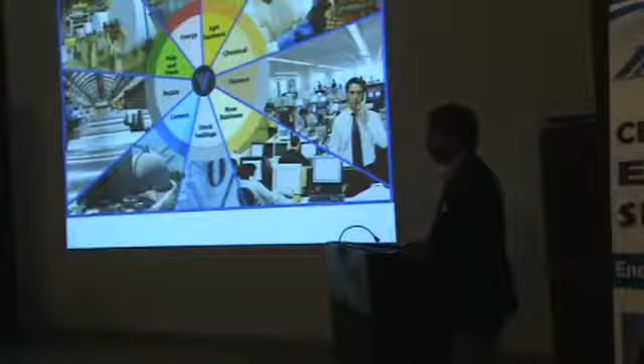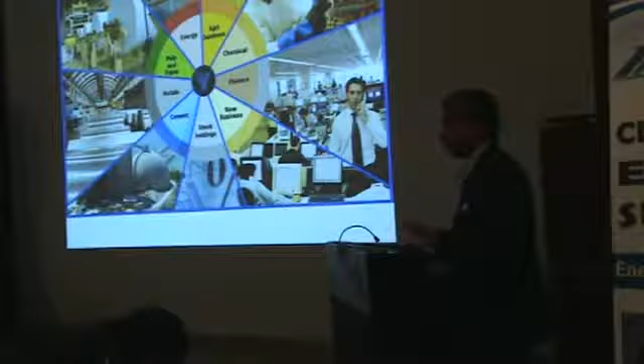A little more about us: we're part of a large Brazilian family-owned company, privately owned, called Votorantim. It's one of the largest Latin American companies in the world. We're into energy, operating 36 hydroelectric power stations in Brazil, and we're the largest producer of orange juice in the world at 35% of the world's supply — compare that to Florida, which produces 6%. We're also into agrochemicals, metals like aluminum, cement, pulp and paper. It's a very large corporation, and St. Mary's Cement is a small facet of that. In our North American operations, St. Mary's Cement fits in there in the middle.

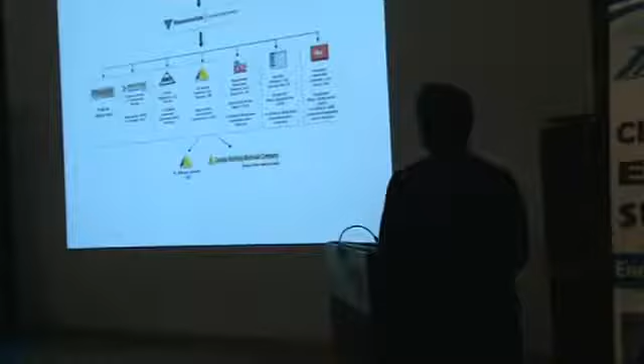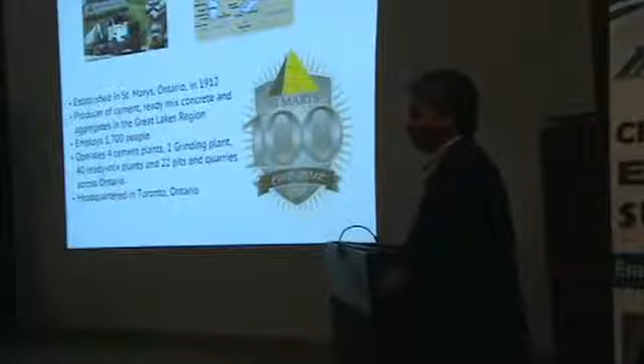We operate 2 cement plants in Ontario, 1 in Michigan, and 1 in Illinois. We're celebrating our 100th anniversary this year. An interesting story: the Rogers and Lind guys, the founders of the company, actually made their money in the Klondike Gold Rush, came back to their hometown in St. Mary's, Ontario, and bought the largest business in town, the local stone quarry. Eventually that evolved into St. Mary's Cement, with the help of one of the private investors, Gooderham and Worts. So there's a little bit of whiskey involved in all that.

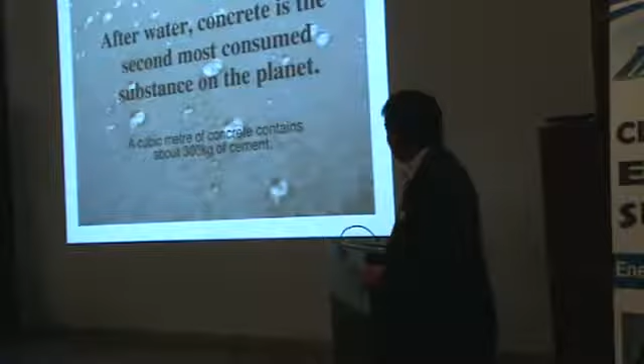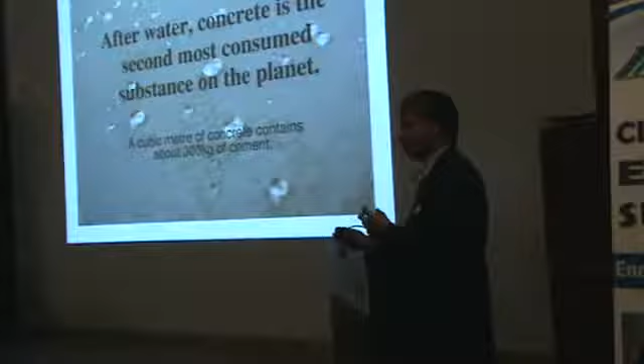Back to this — I'm going to talk a little bit about cement and it going into concrete. After water, concrete is the second most consumed substance on the planet. It's important to understand a bit about cement, because a cubic meter of concrete contains 300 kilograms of cement. Cement is the glue that holds sand and gravel together, and water doesn't just wet the mixture — it actually becomes part of it chemically, acting like a catalyst to the glue.

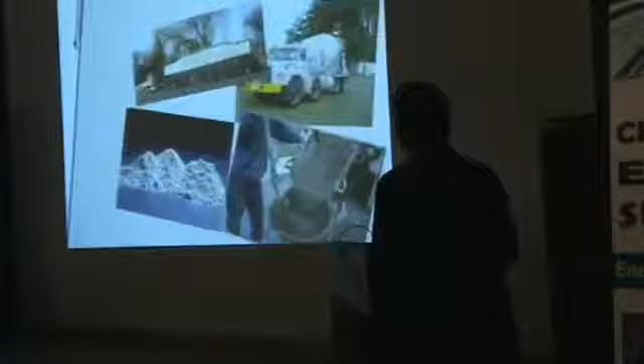So I'm going to take you through some cement 101 — trying not to be a bad teacher like Cameron Diaz in Bad Teacher. I'll talk a little about manufacturing cement. That is not a cement truck, despite the fact that 99% of everybody thinks that is a cement truck — that's actually a concrete truck. The cement truck holds powdered cement, and what comes out of the concrete truck is concrete. So now you know that.

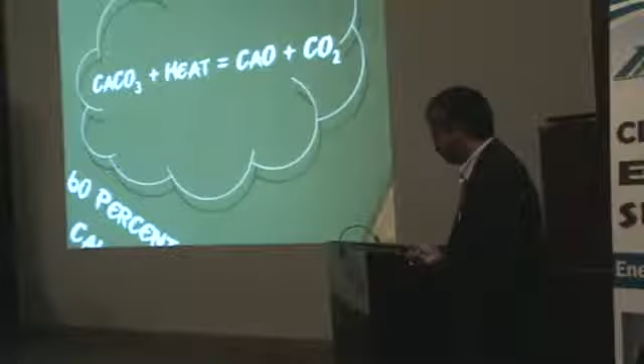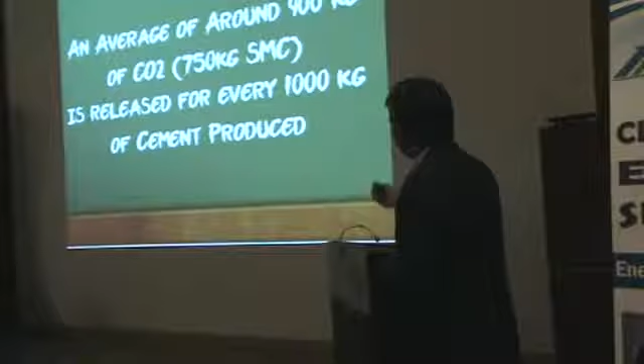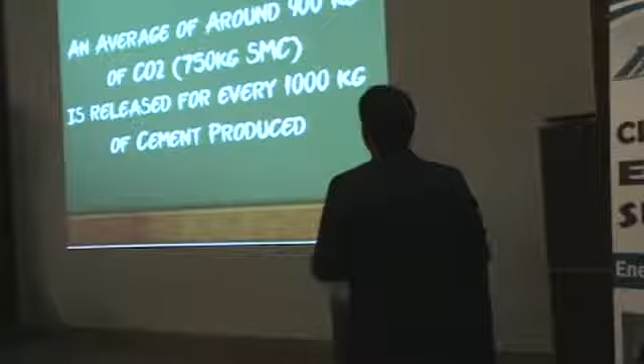Making cement produces large quantities of greenhouse gas — that's the Achilles heel of cement manufacturing. Two sources of greenhouse gas are fuel and calcination. Calcination is when you take limestone, which is calcium carbonate, and add heat to it, producing lime, calcium oxide. That lime is what we make cement out of, and CO2 is what comes out of the stack. The average Canadian cement plant emits around 900 kilograms of CO2. Our company operates the 2 lowest greenhouse gas intensity cement plants in Canada, averaging around 750 kilograms per ton of cement — so 3/4 of a ton of CO2 goes out the stack for every ton of cement that goes out the gates. That's a huge amount of CO2, working out to about 5% of the world's man-made CO2 coming from cement.

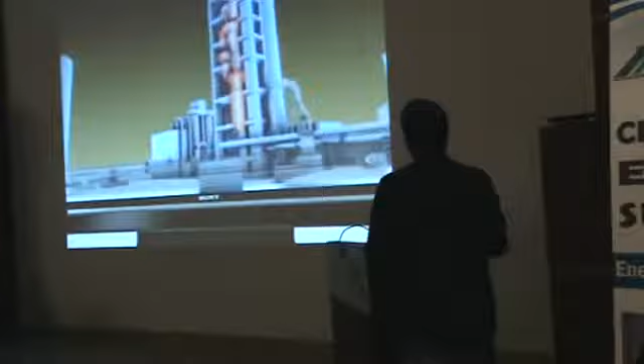This is a nice clip the Discovery Channel did at the Bowmanville cement plant. Basically, we take rock out of the ground and crush it into a very fine powder with big machines — this machine has about a 4,500 horsepower motor, so it's a pretty big motor. It grinds the rock into a fine powder, like talcum powder — that's limestone dust you see there. It gets put into this big preheater tower, the one you see on the skyline of Clarington. The exhaust gases coming out of the kiln are used to preheat that limestone up to a very high temperature, recovering that energy. If you look at those Dyson vacuum cleaner ads, they're kind of mirroring this technology, using a similar approach to de-dust and concentrate the heat.

We get the heat from burning fossil fuels, and we burn a lot of them. The Bowmanville plant here burns about 30 tons an hour of petroleum coke. That's a lot of energy. 92% of the energy we consume, on a gigajoule basis, is coming from fossil fuels used directly.

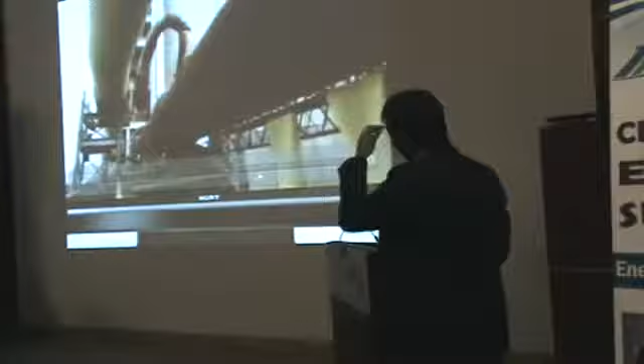So that's a shot inside the kiln from the thermal camera. If you think of that kiln, it's kind of like taking a paper towel tube, putting sugar in one end, putting it on a little angle and rotating it, and the sugar will move from one end to the other. That's all we're doing, but on a ginormous scale.

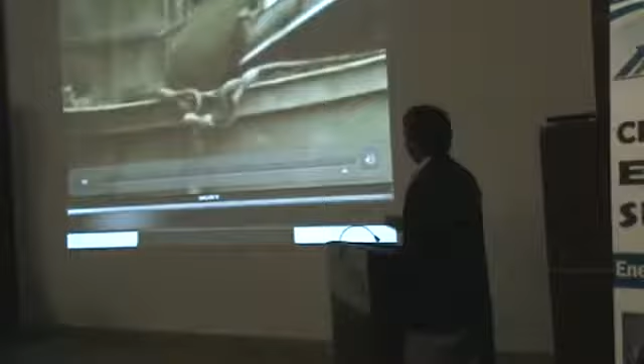You can see there that things are pretty hot. We take the stuff out of the kiln and grind it up again in the presence of gypsum in these big ball mills. These things contain grapefruit-sized balls that just smash around and smash it into a powder. Then voila, the cement truck picks it up and drives away with it, delivering it to the concrete trucks, where we mix it with sand, gravel, and water.

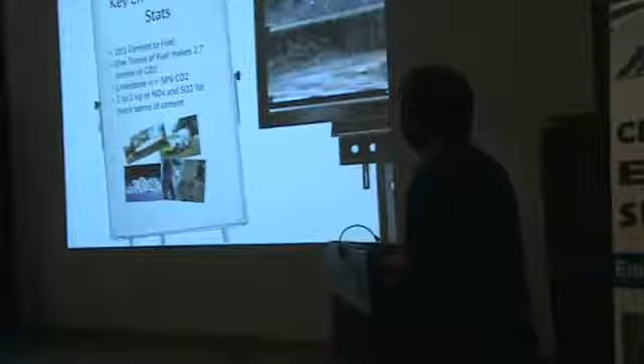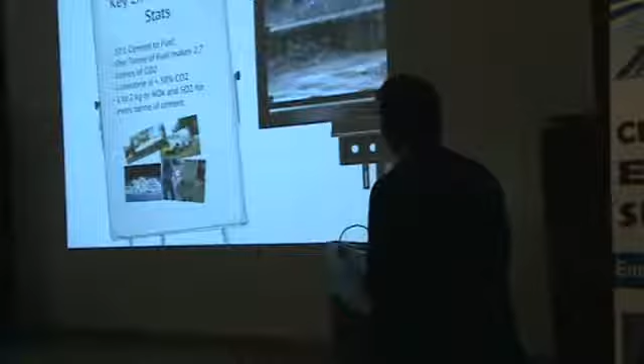Some other key environmental stats: for every 10 tons of cement, it takes 1 ton of fuel, and 1 ton of fuel makes 2.7 tons of carbon dioxide gas. Limestone is about 38% CO2 by mass, so that's a lot of CO2 released in every single ton of limestone. And 1 to 2 kilograms of NOx and SO2, which are smog and acid rain chemicals, come out with every ton of cement.

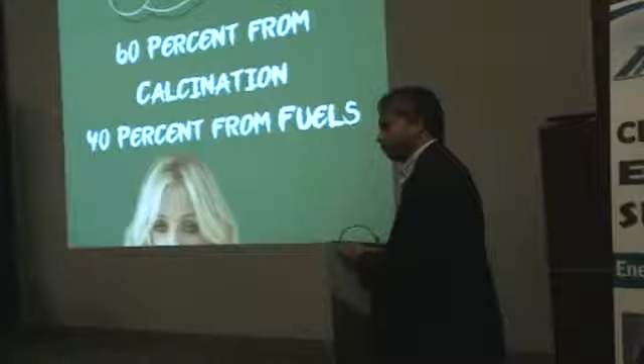60% of all of our greenhouse gas produced comes from the limestone, and only 40% is coming from the fuels. So even if you're as efficient as possible and try to reduce fuels or find greener, carbon neutral fuels, that doesn't help fix the problem coming from the limestone. It's how do we solve that big problem?

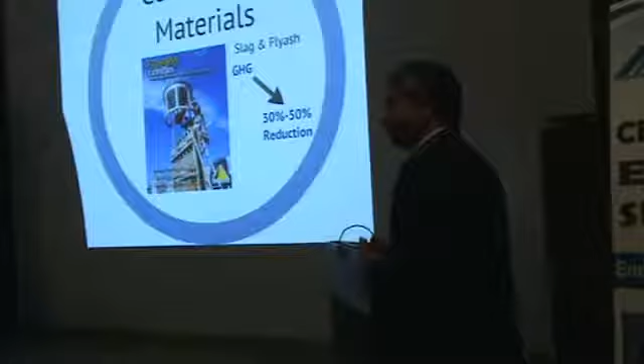Some of the things we've done is look at cementitious materials. Wastes from the steel industry, like slag, and fly ash from coal-fired power stations, can be mixed into concrete and reduce the amount of cement needed by as much as 50%, which reduces the greenhouse gas by 30 to 50%. That's a huge savings in greenhouse gas emissions by utilizing two wastes that would otherwise have to find landfill for.

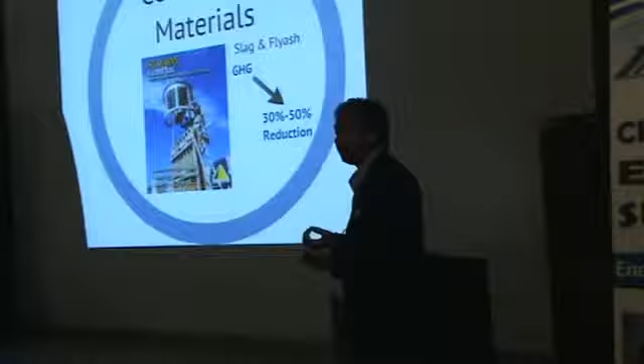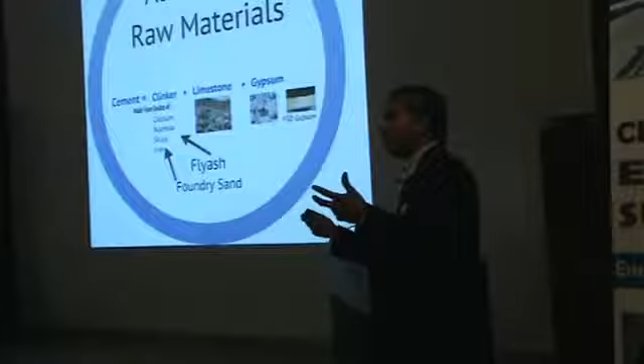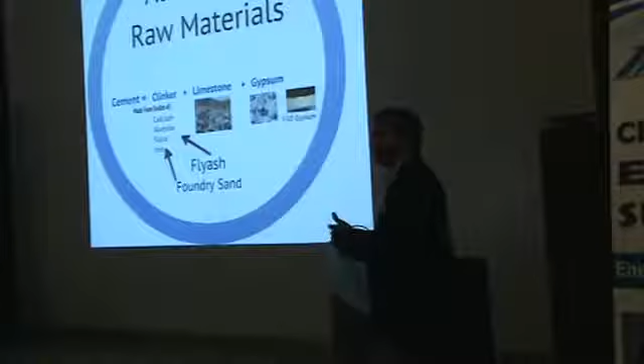Other things we do: alternative raw materials. We can use other raw materials rather than virgin raw materials, reducing our footprint by indirectly reducing transportation distances, and utilizing things like flue gas desulfurization gypsum. We have to add gypsum in, but we can take some flue gas desulfurization gypsum, which comes as a waste from scrubbers at, say, coal-fired power stations, and mix that in to substitute gypsum. So these are some of the things we can do.

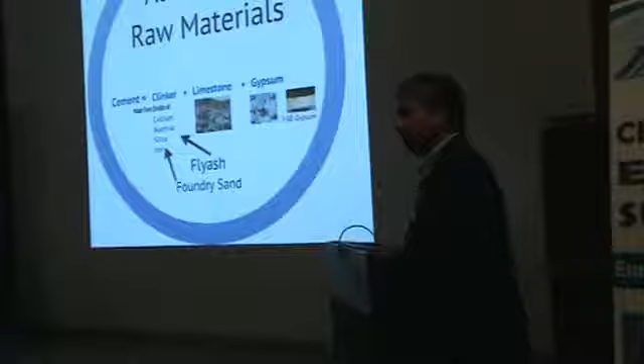Foundry sand from here at Bowmanville Foundry — after they make sand castings and stuff like that, we can take some of that and substitute it in as a silica and iron source for manufacturing cement. That's how we can also help make ourselves more sustainable.

Energy conservation, a big one here in Bowmanville. We're one of 10 companies making a difference on the CIPEC Task Force annual report that came out from Natural Resources Canada. Also, the Bowmanville cement plant here was the first facility of any kind in North America and South America to achieve the ISO 50001 Energy Conservation and Management Standard, and still the only one in Canada to have that. It's a pretty impressive goal here with the help of 360 Energy in achieving that.

Product innovation: the industry got together to develop a new cement standard that we are actively pushing and marketing, which contains about 10 to 15% interground limestone into the cement product. That reduces the amount of material that has to go through the kiln by 15%, which reduces greenhouse gases by 15%. And for what it might weaken the glue effect of the cement, it actually increases the strength equivalently by having microfine sand particles, so that microfine aggregate offsets any dilution factors.

That product is something we're working well on now with procurement at governments, which buy about 60% of our product through municipal and provincial infrastructure. We want them to be the kickstart catalyst to utilizing these products more.

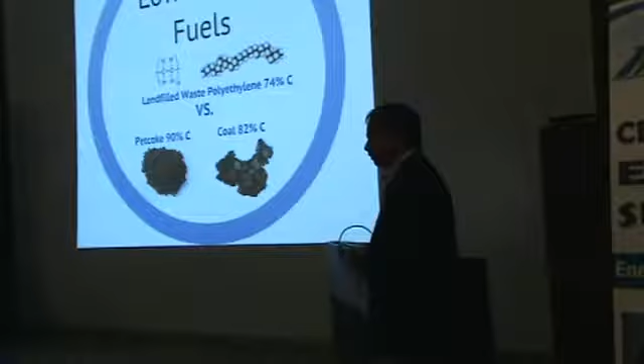Low carbon fuels, utilizing things like plastic bags. We did a trial at our St. Mary's, Ontario plant. At the temperatures we're burning at, over 1400 degrees Celsius, it thermally destroys any organic molecule. There's absolutely an absence of any harmful, toxic organic molecules.

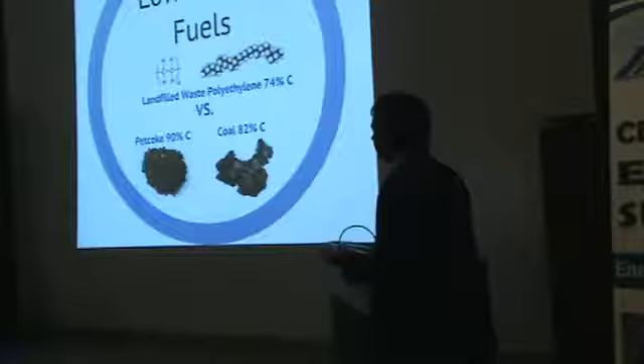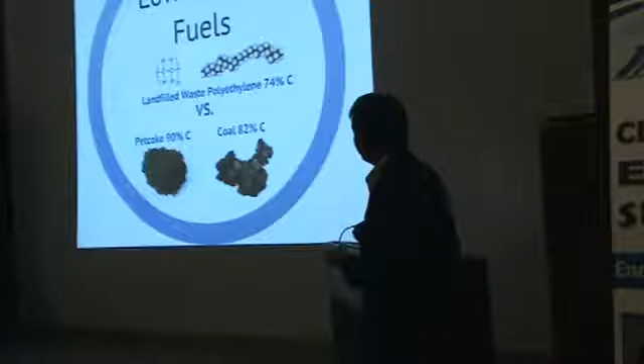And so these things that would otherwise be sent to landfill and waste can be utilized as a fuel that is actually much more highly refined than things like petroleum coke, which is bottom of the barrel, literally, and 82% carbon coal. These things are unrefined natural resources that are in limited supply. And if we can utilize things that have already kicked the can and would otherwise just be thrown in the trash, that's far more sustainable.

So these things make us more sustainable, and it's very important for us, but it doesn't do everything for us. It doesn't solve that problem with what do we do with the limestone. And it's one thing to be sustainable, it's different to be environmental. And environmental is not necessarily economical. It's important that we understand 3 points to the triple bottom line of sustainability, being socially sustainable, environmentally sustainable, and economically sustainable. Without any one of those, you won't be around.

It's one thing to be environmentally friendly, but if you can't do it economically, you're out of business. If you can't do it in a social manner, the public doesn't want you around, regardless of how much money you may make or how environmentally friendly you are. So it's very important to understand triple bottom line sustainability.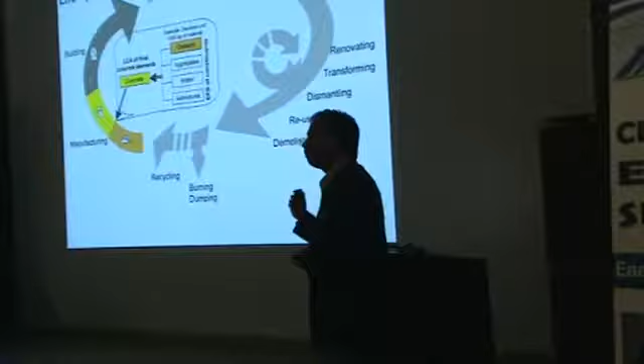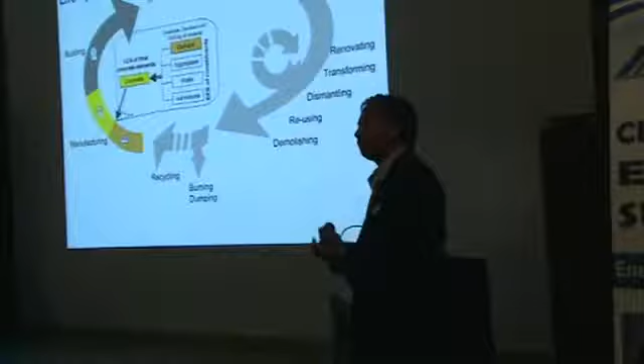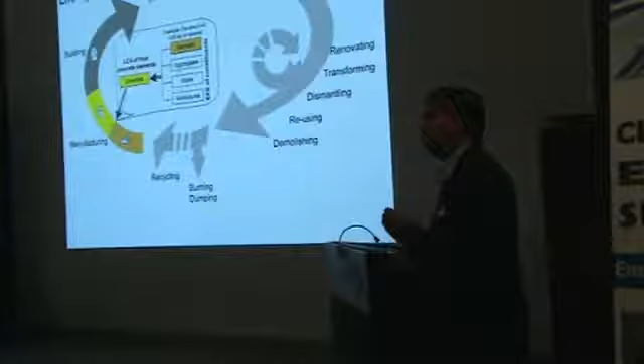And in so doing that, it becomes very important for our industry and for our company to let people understand the life cycle analysis of the products and the projects that come from our building materials, because the types of things that are made from cement are very important to the standard of living that we have today. It's so ubiquitous, this concrete. You're in a concrete building standing on a concrete floor. Those are the things that everybody takes for granted, that's coming from things like the cement plant next door here.

Other big things that people see is when people talk about sustainable energy and renewable energy, they don't really realize that 870 cubic meters of concrete is required for every 1 megawatt of output power. You've got to hold those things to the ground or they're just going to fall over, and you do that with concrete. So 1,500 ton foundations, as well as all the steel, aluminum, magnesium, glass, and carbon that goes into these, and the greenhouse gases that come out for every ton of that.

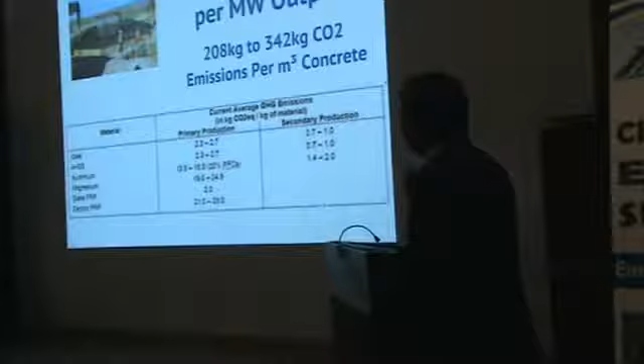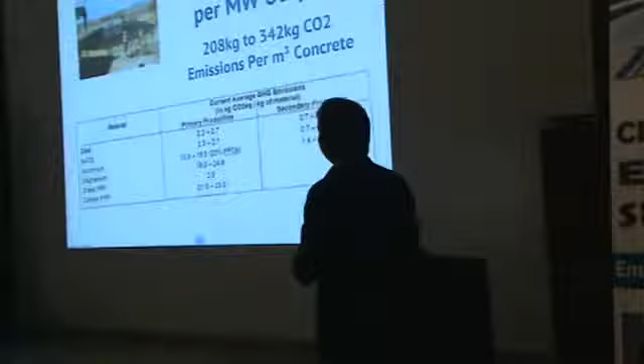That's a lot of emissions, 208 to 340 kilograms of CO2 per cubic meter of concrete alone. So these things start at a deficit on the greenhouse gas that they can offset, and they have to work for a long period of time before they can actually break even on their greenhouse gas footprint. So how do we make these projects more sustainable? And why should we, as a cement industry, be worried about that? Well, we're worried about it because we use huge amounts of energy, and I'll get into that a little bit later.

The partnership we have with Pond Biofuels here is an interesting one. We saw that we produce huge amounts of greenhouse gas, and if we want to be sustainable, we better find a way to deal with that greenhouse gas. Now, there are other things you can try to do with it, but they produce a waste. If you produce a waste, you now have a waste problem. You now have trucks leaving with waste. What do you do with that? So we have to try to find something that doesn't involve that.

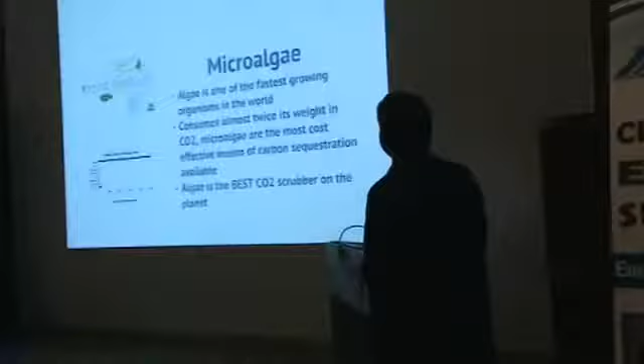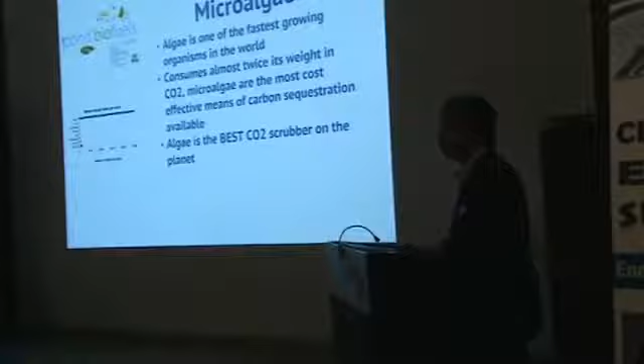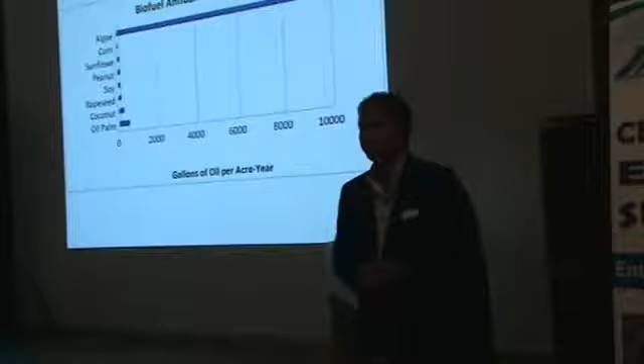So one of the things about algae is it's one of the fastest growing organisms in the world. It consumes twice its weight of CO2 every day. And it's one of the best CO2 scrubbers on the planet. It just eats up CO2. If you look at algae for generating biofuels, by far it blows away everything else on the planet that we think of. And not only that, but it doesn't compete with crops for food. So the food crop argument doesn't get involved when you talk about algae-based biofuels. So you're talking about producing between 10 and 13,000 gallons per acre per year versus corn at 300.

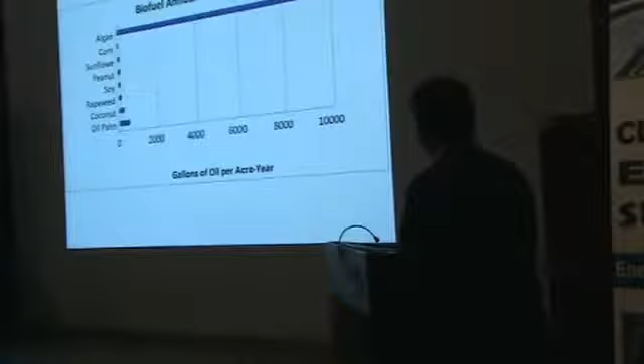So how does the algae do it? What does algae do? Well, algae is basically a plant, but a single cellular plant. And it's photosynthesis. It takes the energy from the sun or from artificial light, and it will consume that by breaking the CO2 into oxygen and carbon. It uses the carbon to manufacture itself as a carbon-based organism and releases the oxygen. And from that, we can then split that, harvest the lipids, the oils, and manufacture things like biodiesel and glycerin.

So how do we get down to this? When we got into this project, we thought, okay, well, there are a bunch of companies out there doing algae, and we looked at them and they talked about, oh, we've got algae growing in a beaker, so maybe we'll build a beaker so big that it'll work for your cement plant. We kind of went, I don't know. These guys approached us and they said, we want to scale down existing processes. Look at big industry and scale it down.

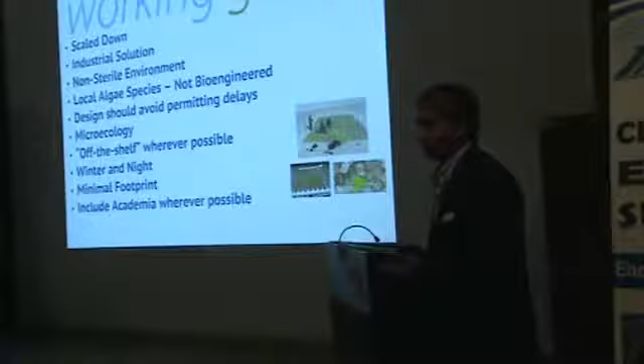We want industrial solutions. We don't work in a sterile environment. I mean, at a cement plant, a surgical instrument is a sledgehammer, right? It's not a very sterile environment, big industrial stuff. We want to work with a local algae species. We want to make the worst environmental hazard be the equivalent of spilling a little bit of grass seed on the lawn. You hear about people biologically altering algae species for maximizing oil, but there's a reason why we don't do it: the potential for ecological issues that we don't want to get into.

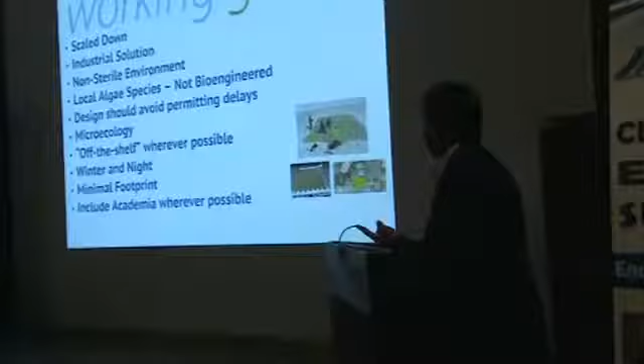And second of all, the algae species that we selected is the same one you find in a puddle outside, literally. We picked that because it's had a couple billion years of evolution to say that it's the best species out there right now anyway. We wanted to avoid permitting delays, so we went with a very small scale at the maximum we would be allowed to do without going down multiple years of permitting delays. We wanted to find a solution today, not get caught up where nobody at the Ministry of the Environment has ever heard of an algae project on stack gas, so they scratch their head and wait 2 or 3 years. We didn't want to get into that.

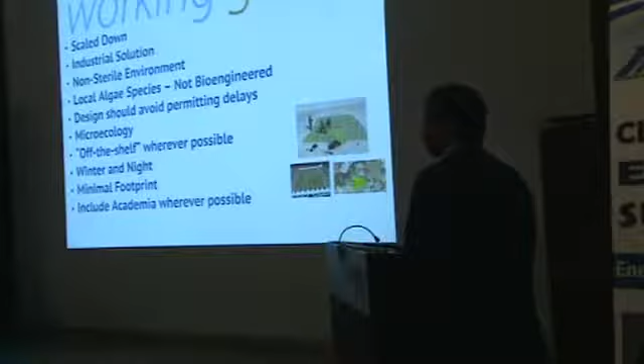We understand that we manage a microecology because we can't operate a sterile environment. You may see a pine forest of beautifully planted trees, but what you're not paying attention to is that there are little shrubs, birds, and bees flying around pollinating things. We have to have the same sort of health in our algae farm to make sure we have a microecology going there, and that's what gives us a very healthy system. We want it off the shelf wherever possible, so our relationship with Pond Biofuels did not pay for them to invent all sorts of stuff that already exists.

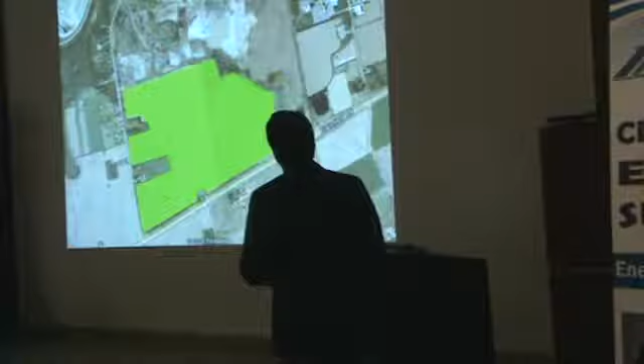And winter and nights was an important thing. We operate 24 hours a day, 330 days a year at our cement plant, and we don't shut down except twice a year for maintenance. So the only thing you're doing with open ponds is playing hockey on them in the wintertime. And if you used tubular bioreactors, which some of you may have seen in the biofuels space, we would have needed over 300 acres of space, versus the project at Pond Biofuels, which will take up about 15 acres. The difference is huge, and that makes this technology very implementable on existing facilities with the existing real estate.

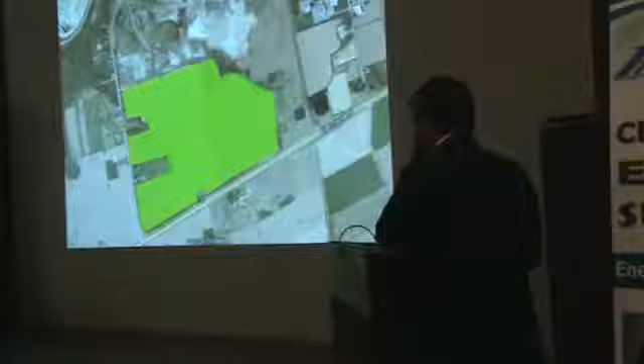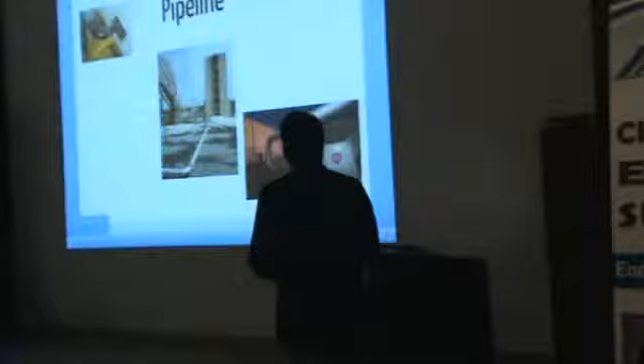So minimal footprint was important to us, and also to include academia wherever possible. In our partnership with Pond Biofuels, we didn't want to be paying for their PhD, so to speak. We wanted to make sure that people working towards their PhDs are given the opportunity to conduct their research with us. So we sat around and said, okay, how do we start this project? How are we going to get the smokestack gases out? So a few beers later, on a couple of napkins, we drilled a hole into the side of the smokestack.